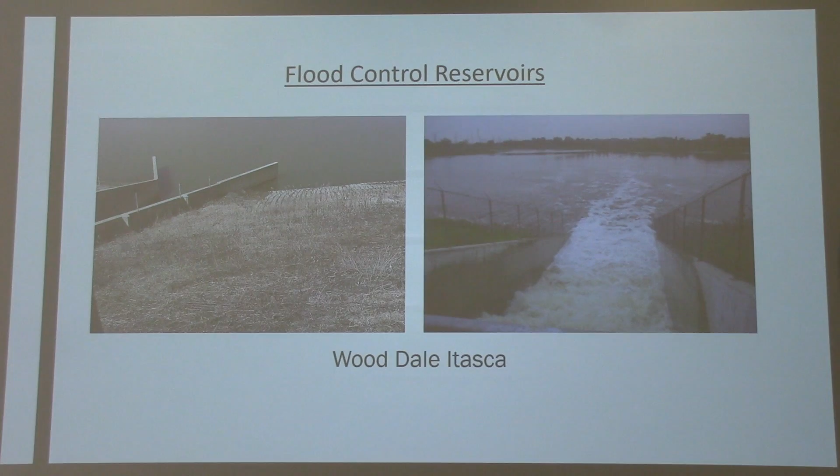So these are the types of things. These are big reservoirs that are siphoning off water that would otherwise go in streets. We do a lot of green infrastructure related work, mundane things. These are fairly routine. This is a large, for those of you that know where the Morton Arboretum is in the Chicagoland area, this is a 10 to 15-year-old pavement that has held up great, provides attenuation of flows. Lots of examples of these.

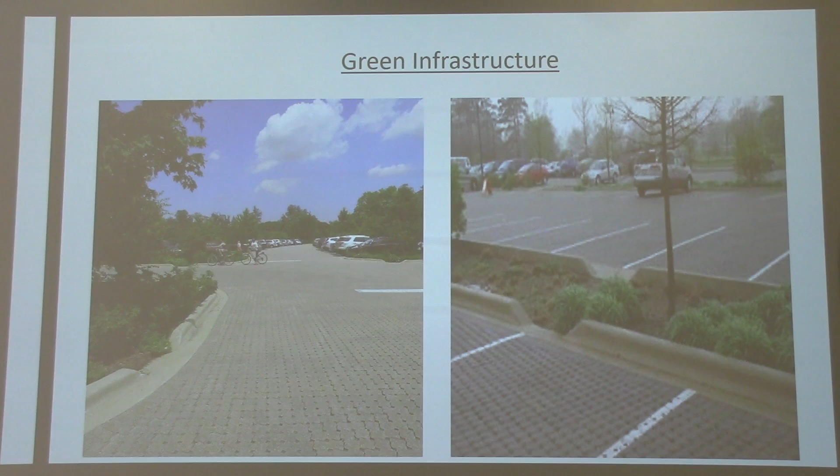So then we have to move the water around because it's too late to accommodate natural storage or depressional storage. We have to design big tanks, big pumping stations, and you can see a smattering of these. And those you don't get at Home Depot. You're not going to pick up a generator that can power 500 cubic feet per second of pumps. These are all special made. You have to have thought on all these.

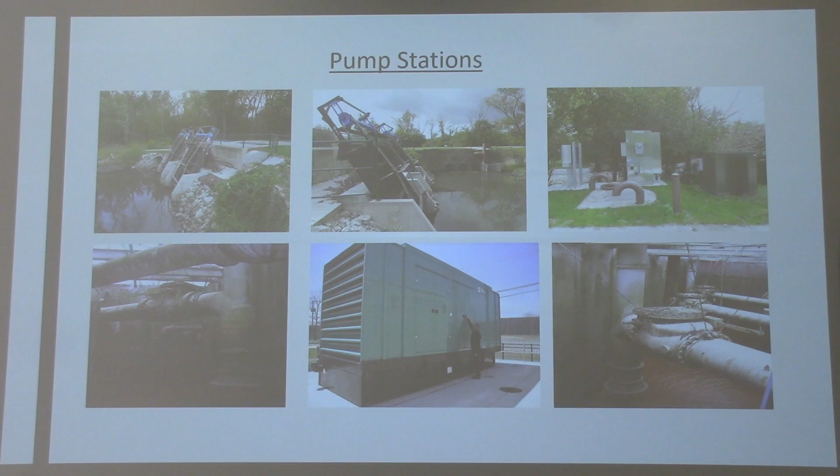And these are just some examples of things that my engineers do. We have in the different groups in the company about 430 engineers or staff, total staff. So I got to do a lot of things to keep them busy. These are pretty. I could show you bridges and things like that, but for those of you that have any experience with golf, this is Medinah Country Club where they have lots of different tournaments. So we size waterway openings on these man-made facilities.

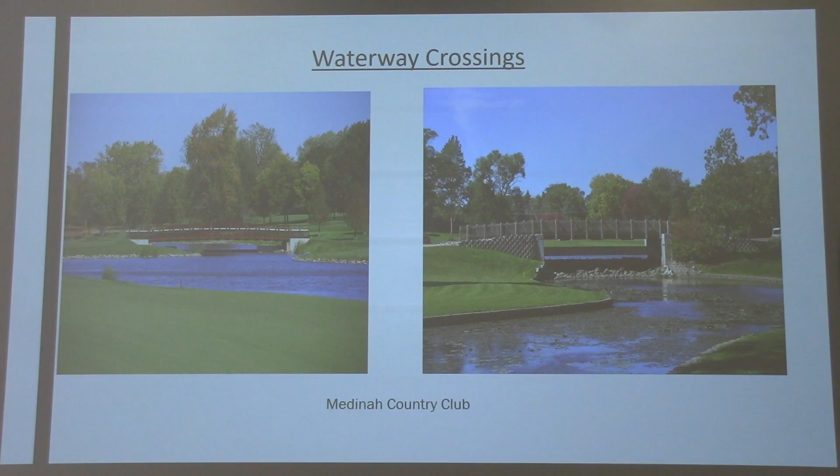Once again, by the time we're involved with it, 100 years ago, the combined sewers were put in. 100 years ago, the channels were straightened. 100 years ago, the valleys were put in without any notion for adequate overland flow or any consideration of conveyance. Flood walls, and you can see the interface between the legacy, this is the combined sewer area, but these are things that, believe it or not, you guys are going to say that looks pretty straightforward structure, and it is. But the more important thing is getting buy-in from a community that does not want to see man-made or non-aesthetic features. I'll talk a little about that.

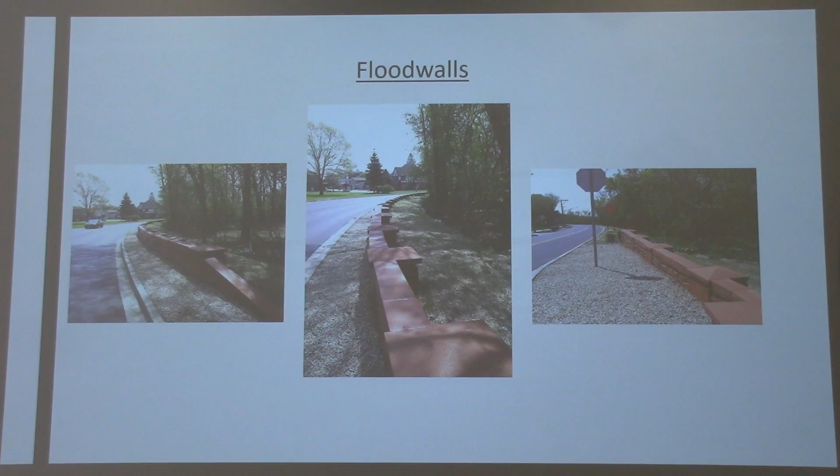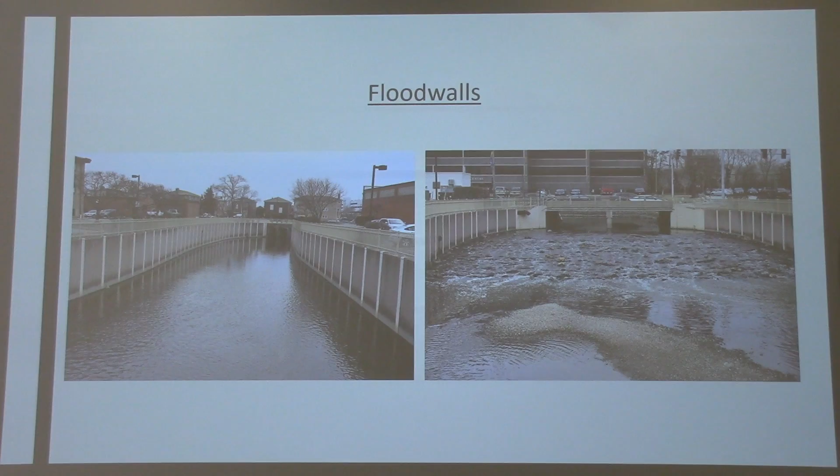Flood walls, this is an example of a channel that used to be about 15 feet wide, shut down a major roadway arterial. You can see it's smack dab in between homes, businesses, and other man-made boundary conditions. Lots of sewer separation. There's legacy. Everybody understands the difference between separate sewers and combined sewers. The combined sewer system, if those of you that know 294, everything to the east is primarily combined sewer. And in this particular case, just tackling that sewer separation, which seems so easy. I wish when we were in graduate school, they were separating it out. Sewers, they stopped for decades, and no money was put into it across the country.

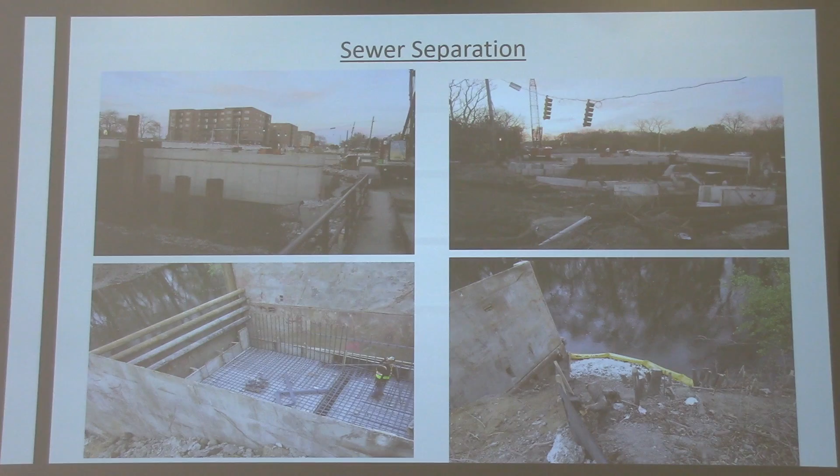But these are the types of things. These are tough urban conditions, not as much of a legacy as Padua in Italy, but nevertheless, we do have many built environment constraints. So this gives you an idea. You can see that the constraints that you face are all over.

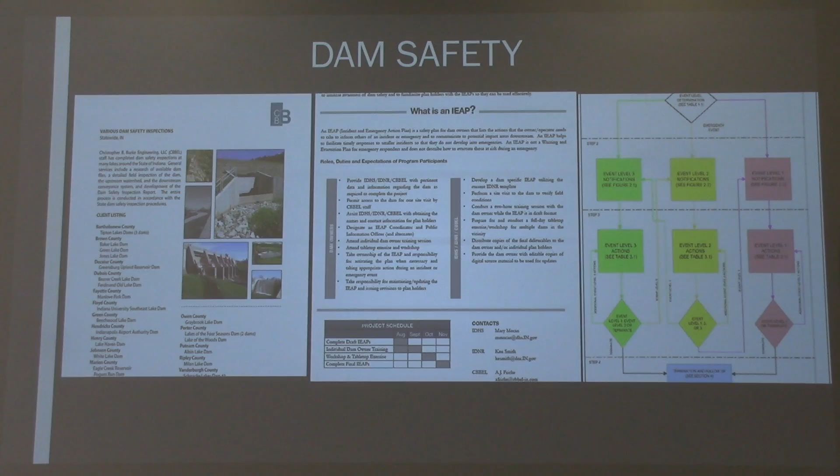Now, we also have man-made. We have dams throughout, more in Indiana than in Illinois. And so what we do in my Indianapolis office, we do a lot of manuals. We generate a lot of things taking into consideration the different types of things. So the dams are there. There always is an action plan. There's a dam breach inundation method. We look at state-of-the-art modeling of dam breaches, simulating the impacted area downstream, and this is something that my Indiana office does quite a bit. They've developed manuals that outline the strategies that one takes and the dam inspections that need to be done. These are some examples of those components of those particular reports and studies.

Now, in some cases, there's nothing you can do. It sounds pretty cruel. There's some elected officials in northeastern Illinois that say, maybe we should just buy people's basements. Are we at that point? I don't know. With climate change and the impacts of the 100-year 24-hour rainfall event, the 100-year was just changed for the state of Illinois about 2 weeks ago. So in a lot of cases we're not going to be able to afford any significant flood mitigation measures. And so maybe we're at the point where we are buying out basements of homes because we can never stop the problem. It's sad that we've gotten to that point, but perhaps in the urban areas.

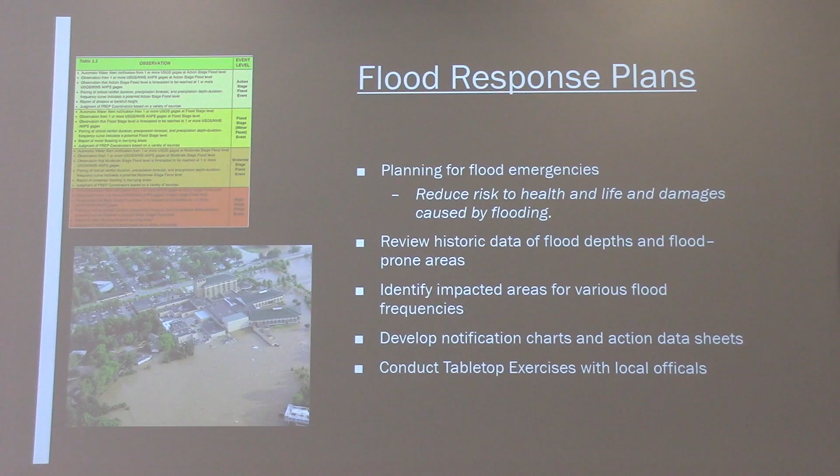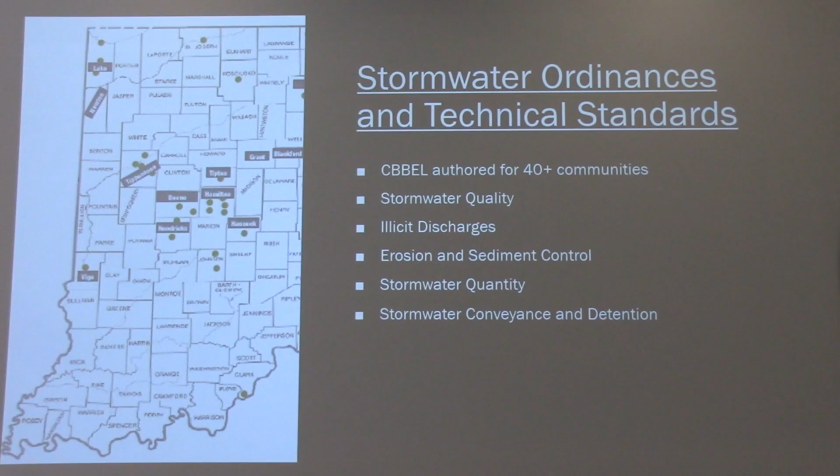Remember that Illinois, and I'm going to switch back to Illinois, Illinois is $130 billion upside down. I didn't say million. I ask my students all the time, and they go, $500,000, $2 million. They're off orders of magnitude. So there's no money to start doing all these. So we also write a lot of ordinances and technical standards, and this is a smattering of the different types of work throughout the state of Indiana that my staff is involved with.

Tunnels. Some of you say, hey, tunnels are over with. All right, tunnels are not over with. Tunnels are expensive, but if you're looking at a water quality issue, addressing combined sewer overflows, getting them out of the waterway, conveying them to some type of area where they can be treated, this is the type of thing that you look at.

Now, Dr. Sinha taught an infrastructure engineering course when I was a graduate student. I had been at the original deep tunnel, first stage of the deep tunnel up in Chicago, and I had pictures, and he had me present those a long time ago in class.

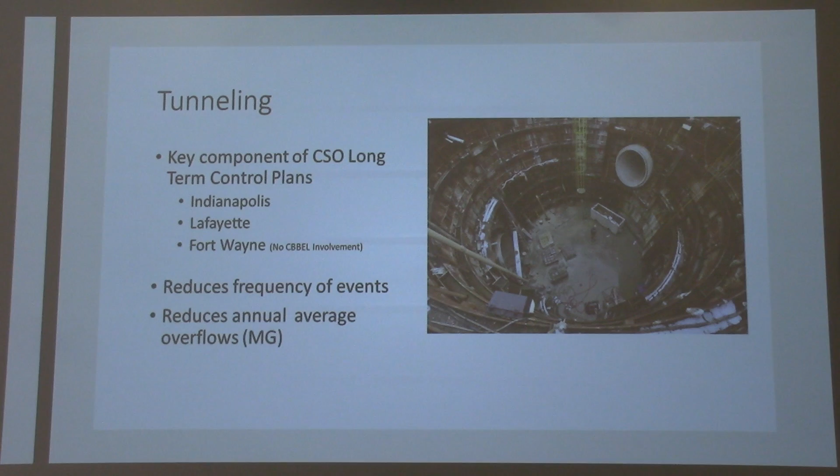What happened was they stopped funding them, so we have isolated ones. Indianapolis, Lafayette, and Fort Wayne have been addressing these because of consent decrees. Because if they're not taking care of the combined sewers, they're in violation of water quality. And you can understand the idea of the urban area. Any of these deep tunnels, Milwaukee has one, Chicago has one, which is connected to 40,000 acre-feet of storage in one particular case.

You build up geotechnical engineers. These are the things that all civil engineers like. You got geotechnical, you got structures, lots of structures, you got the hydraulics, you got two-phase flow. It's really remarkable when you start looking at the challenges of that.

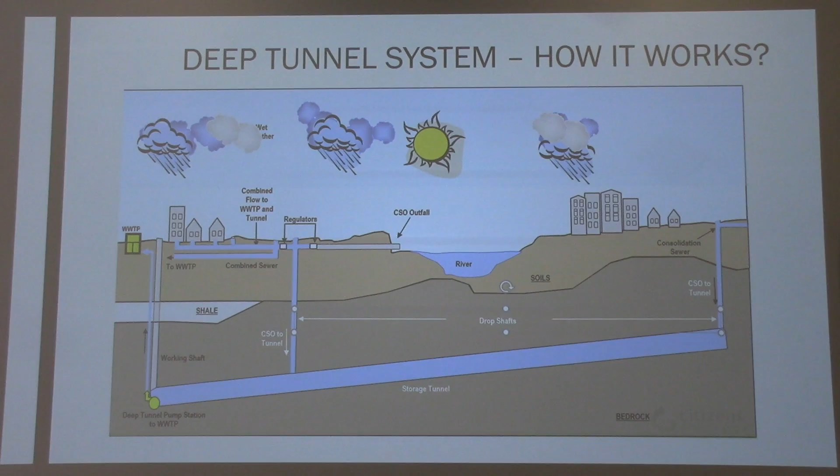And they're responsible for these things. Their great concept of reverse slope driveways. Doesn't that sound like a really good idea? You park the car under. Well, gravity never forgets, and the water rushes towards those basements. And so you can see this used to be a constant slope right down there. And there are thousands and thousands of these reverse slope driveways. It might have been a good idea to get them a nice award for architectural design. These are horrible. These have kept a lot of my engineers busy with the mundane.

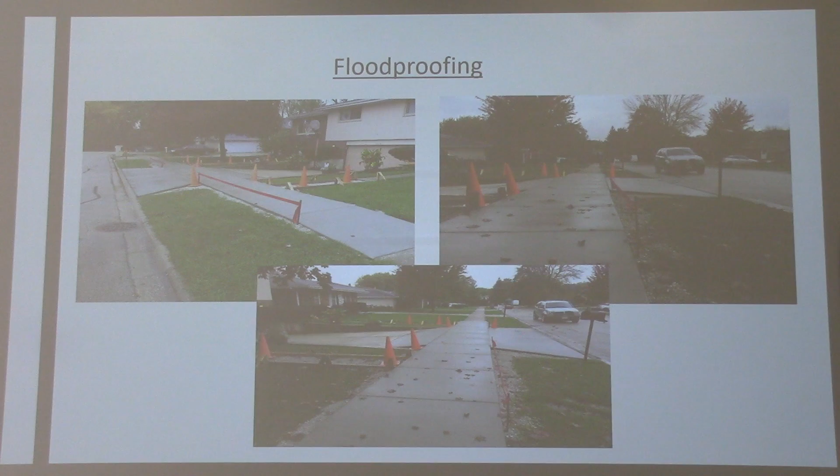Those of you that also understand, you have ADA requirements, in addition to your car not liking to be bottomed out, right? So you can't have a peak in the grade. It's an interesting and, especially for young engineers, a nice little project to do.

There are also these big flood walls, which also have an accompanying internal drainage condition. In this particular one, the agency that built the interior drainage system designed it for a criteria that is no longer valid, like a 14-day storm. The difficulty is the pumps can't wait 14 days because people flood in a 3-hour storm. So the pumping stations and flood walls all have to be updated, really interesting type things.

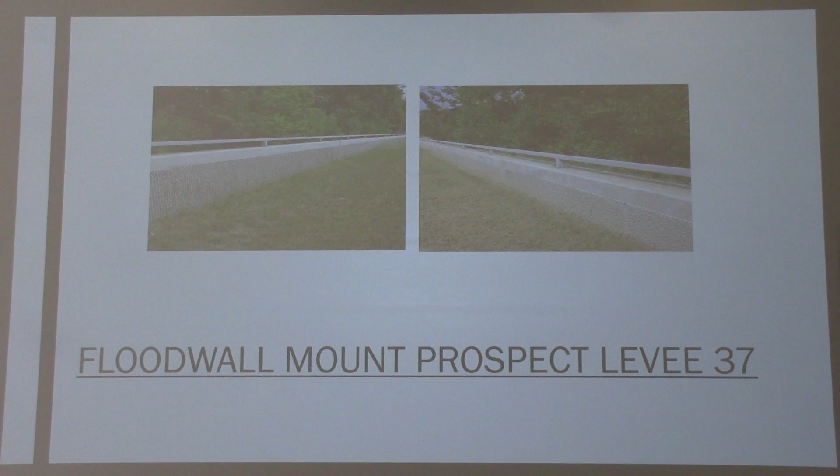But as I say, there's a time and a place, and I rep for trees and rain barrels, right? Just to be clear, I'm the chairman of the board of the Morton Arboretum, one of the largest in the Midwest, which likes you planting trees, and the chairman of the Conservation Foundation, which also sells rain barrels. So I think rain barrels and trees are great, but not for solving problems like this. These are enormous problems. There's nothing that's going to take place to accommodate these chronic flooding problems, and so they rebuild. So that's an issue that we have.

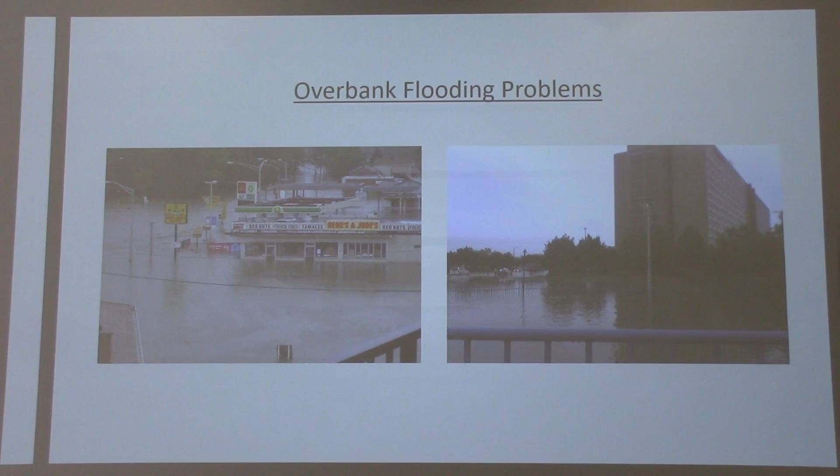And nobody in Chicago did I hear, all winter long, blame somebody else for the snow, right? No one ever blames someone else for snow. They say, I live in Chicago. But when it rains, they want to blame someone. They always blame the gatekeeper, the municipality. I've had mayors say, are you crazy? Why in the world would I ever shut a valve to flood out all my residents? I want to be elected next time. But there's always this thing that there is somebody to blame.

We've had over my career gymnasiums, high school, junior high gymnasiums, filled with people on one side that want to solve the problem, and the other that want the solution to be moved somewhere else. Funding, I've already talked about that. I already talked about the fact that sometimes there are projects that are never going to be economically viable. Elected officials, we had that issue, and go figure, their level of commitment.

A lot of them are UWT grads, okay? I've already established that we're proud Purdue grads. University of Wishful Thinking. They're hoping that it's not going to happen on their watch. And sometimes, hey, I haven't gotten flooded since you painted the signs, what does that mean? Painting signs means nothing, but people want to attribute dry weather to some of that.

The term 100-year flood. People say, hey, I flooded last year, I'm going to redo the basement because I'm 65 and I only got about 25 more years of life. So we've tried with the 1% ISO risk line, forget about it. Or trying to relate the 100-year flood to the probability of winning the lottery. I don't know about you, but there were about four groups in my office that know statistics, know probability, and sure as heck bought a lot of lottery tickets last week.